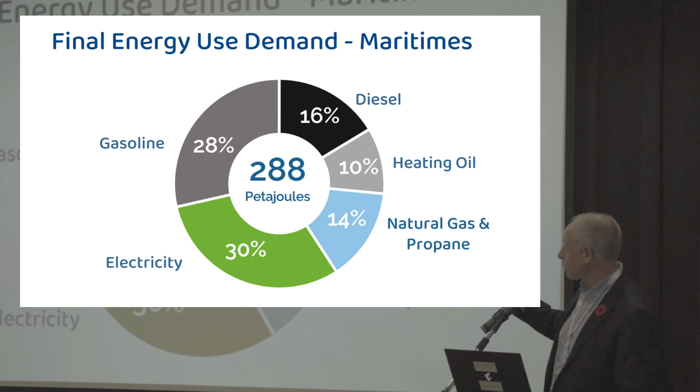So we use electricity to meet 30% of our energy needs. About 2/3 of that is clean. The other third is not. And over 50% of our energy demand today is met by refined petroleum products, either gasoline, diesel, or heating oil, and then about 14% comes from natural gas and propane. And like I said, almost all of this by 2050 is going to have to be clean.

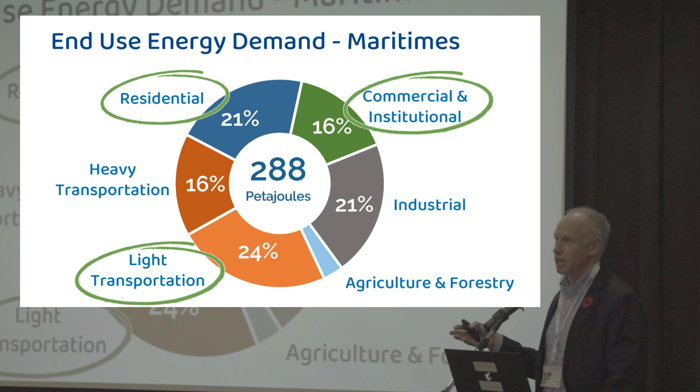And we hear a lot that the way we're going to get to net zero is we're going to clean the electric grid and we're going to electrify everything. And I think that's partly true, because when you look at many of our energy uses, they can be electrified relatively easily. So sectors like light transportation, heating, many residential and institutional and commercial buildings, and even some of our industrial processes can be fairly easily electrified.

But not all. There are many other energy uses that are going to be very difficult to electrify, or at least very difficult to electrify with batteries alone. So sectors like heavy transportation and high temperature industrial processes where you need combustion, like to make a brick or to make steel. And some commercial and institutional buildings, especially really big and really old ones, might be really difficult to heat only with an electric heat pump. And the reality is that these much more difficult to electrify sectors currently represent about 1/3 of our total energy use. But we're going to have to figure out how to decarbonize them too.

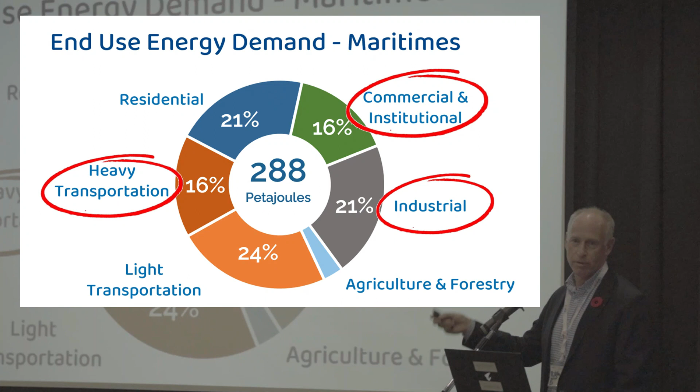So regardless of what the path to net zero is going to be, we are going to need clean electric grids, and we're going to need a lot more clean electricity. The Canadian Energy Regulator has forecast that here in the Maritimes, electricity demand is going to grow about 60% between now and 2050.

And so just to put that in context, to keep pace with growing electric demand, we need to build another hydroelectric facility the size of Muskrat Falls every 5 years until 2050. That's how much more electricity we're going to need. And even if we do that, it still won't likely be enough.

And part of the reason for that is that a lot of the increase we're projecting for electricity is going to be renewable, and those renewable sources like wind or solar are intermittent. And when we add a significant amount of intermittent renewables, it creates challenges trying to balance supply with demand. So if you have too much supply, you either have to store some of that supply or curtail.

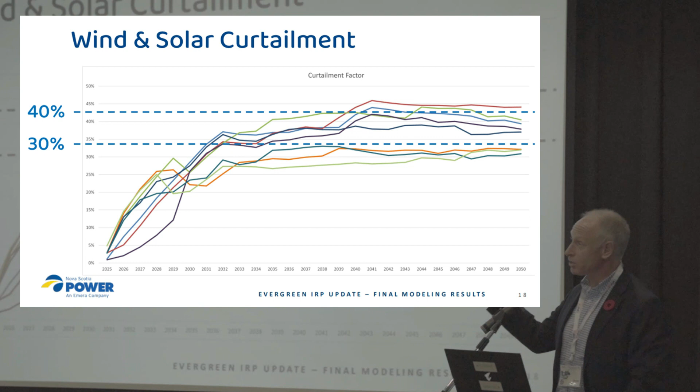And as a result of that, from Nova Scotia Power's latest integrated resource plan, they're forecasting that 30 to 40% of the potential generation from wind and solar will be curtailed through a combination of wind integration constraints, transmission limitations, or just balancing supply and demand. So times when supply exceeds demand, especially in the fall and in the spring. But we can do stuff with that power.

So what's the solution? I'll say, first of all, there's no one solution. I think that we know that. But one of them will be that in addition to having a lot more clean electricity, we're also going to need other types of clean energy. Types like green hydrogen that can be produced at large scale and then stored and transported and used in many of the ways that we use fossil fuels today.

One of the reasons why fossil fuels have been the backbone of our energy system for over 100 years now is because you can store that energy for a long period of time. And especially in a northern climate, we're always going to have that need. We're always going to need more energy in the winter than we do in the summer.

So we think that building a much more integrated energy system with an electric grid and gas grid working together in complementary ways is going to be a better way to get to net zero than trying to do it all with only electricity. And we see the more integrated energy system with linked electric and gas grids working together will also build a more flexible and a more resilient energy system. And I'll talk about that a bit in a minute.

But fundamentally, we have to start with two foundational principles. We've heard a lot about this today. Energy efficiency and conservation has to be job one. We need to do all we can to use less energy, conserve what we have, make our buildings better insulated, put in heat pumps when we can, convert from internal combustion vehicles that are about 20% efficient to electric vehicles that are a lot more. So that should be job one.

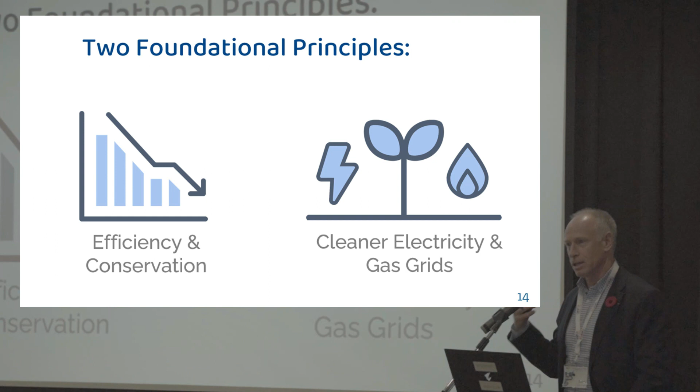But then we're also going to need cleaner electric grids and a cleaner gas grid. And we see the gas grid playing three very complementary roles to the electric grid in this more integrated low-carbon energy system. The first way that the gas grids can support the electric grid is through peak demand mitigation.

Because as we electrify more end uses like heating buildings, transportation, industrial processes, peak electric demand is going to grow. Energy efficiency and all that stuff is going to help have it grow not as much, but it's still going to grow significantly. And it's going to be a bigger problem in the Maritimes, even than other parts of Canada.

So in Ontario, for example, their electric grid peaks in the summer. Ours peaks in the winter. And probably, at least unless climate change gets to the point where winters here aren't cold, our electric grid is still going to peak in the winter. And this is one of the areas where the gas grid, especially the lower carbon gas grid, can play an important role. And let me try to illustrate this.

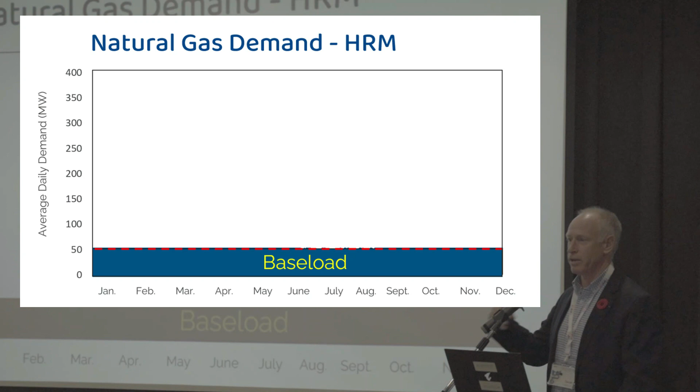This chart shows total natural gas demand in HRM for a full year back in 2021. We have about 50 megawatts of base load demand. So that's demand for domestic hot water, industries that are basically running 7 days a week, 52 weeks of the year. In the winter, average demand for gas is about 250 megawatts, so about 5 times higher. Not surprising.

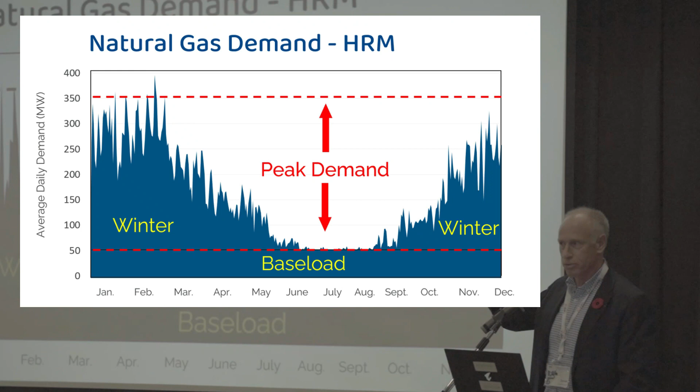On cold winter days, it goes to about 350 megawatts, so about 7 times higher. And you'll notice here, on the peakiest day, it was actually about 8 times higher. But the reality is, unless we want to be cold on that peakiest day, we need energy for that day too. The good news is that the gas storage and transmission and distribution system has really been built to address peak demand.

We can store enough gas, whether it's fossil natural gas, renewable natural gas, or other low carbon gases. You can store it in massive quantities. And unlike a battery that can store energy for a few hours or a day or two, you can store that gas for an indefinite period of time. Frankly, you can do that with oil and gasoline as well. That's why we have these massive tanks. We don't like them, but the reality is they can store energy for a long, long period of time.

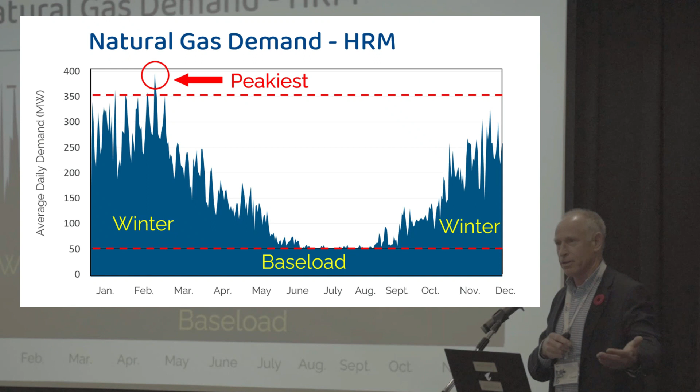So that becomes important. And then you think, okay, so how does the ability of the gas system to do this complement electrification? Here's one example. In a hybrid heating scenario, electric heat pumps are an excellent and very efficient way to heat most buildings on most days. But on the coldest winter days, when the coefficient of performance of the heat pump drops significantly, just as demand for electricity begins to skyrocket, that causes a huge spike in electric demand.

And in Nova Scotia Power's integrated resource plan, they obviously look at many, many different scenarios. And one of the scenarios they looked at was hybrid peak mitigation: how much of that electric peak do they think they could mitigate with a hybrid heating solution? And what they determined is that there may be significant cost savings to heat many, if not most, buildings with a hybrid system rather than 100% electric.

And the way that this would work is, you have an electric heat pump, and probably 80% or more of the heating demand for that building is met with the electric heat pump. But on the coldest days, when peak electric demand goes up and the efficiency of the heat pump drops, at some point the smart control takes over, shuts the electric heat pump off, and turns a backup boiler or furnace on. And that, frankly, could be run by any kind of fuel.

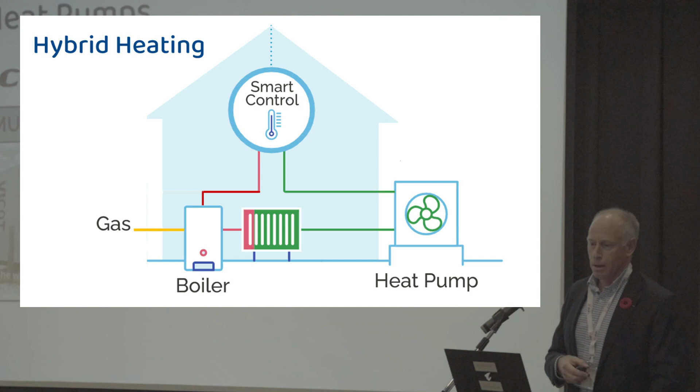Another potential solution in certain kinds of buildings is gas heat pumps. Gas heat pumps work in a very similar way to an electric heat pump. They transfer heat from the air and can do that without putting much strain on the electric grid. At Eastward Energy, we're currently involved in 3 different projects to test different types of gas heat pumps in different kinds of buildings. We have one for large multi-unit residential buildings, one for smaller MURBs, in the 4 to 12 unit range, and we're also starting a project testing a gas heat pump in single-family homes.

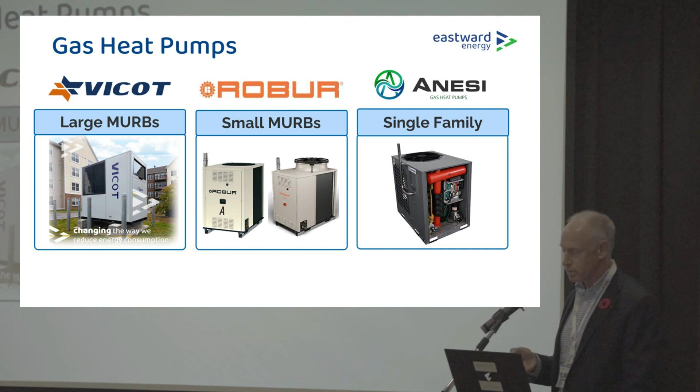This is a 140-kilowatt gas absorption heat pump that we've installed in a 65-unit apartment building in Halifax. And I'll say at the outset, I'm not saying that a gas heat pump is better or worse than an electric heat pump. It really depends on what the application is.

Electric heat pumps generally have a higher coefficient of performance, and where they can do the job, they're probably the best solution. But in many existing buildings, especially older buildings that have a hydronic system and aren't very energy efficient, a gas heat pump might actually be the better option. A gas heat pump does operate similarly to an electric heat pump, but it only uses about as much electricity as a hairdryer.

So that means that, while lots of buildings will have electric heat pumps, and on cold days, electric peak will go up because of those, a building that has a gas heat pump is not going to experience that peak. One of the other benefits of a gas heat pump, again, in the right kind of building, is it can essentially be a drop-in replacement for an oil or a natural gas boiler. So there's minimal additional capital.

So often if you're retrofitting a building, especially an older building, to put in an electric heat pump, the cost of the electric heat pump is only a small portion of the cost. Often you're having to convert a hydronic system to a different kind of system, or doing a significant energy retrofit of the building envelope to ensure that it can operate effectively with an electric heat pump.

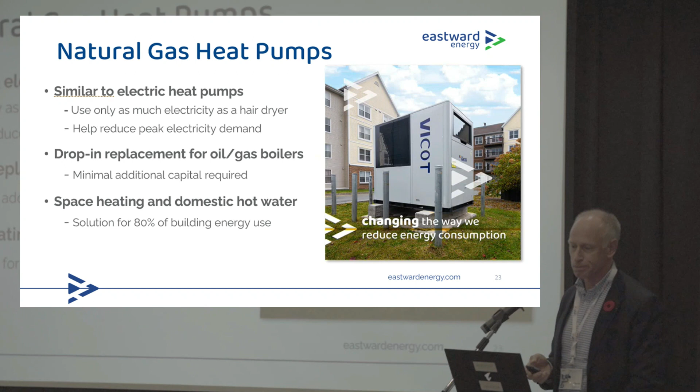Conversely, a gas heat pump like this one can just be dropped in, connects directly to the hydronic system in the building, and can provide both space heat and, in some applications, domestic hot water as well. The second area where we feel the gas system can complement the electric system is in the area of resiliency.

Almost all the natural gas infrastructure here is underground, so it's not vulnerable to severe wind events, which we experience a lot of, and unfortunately with climate change, we're experiencing them even more frequently. So as a result, a typical Eastward Energy customer would experience a 1-hour service interruption every 70 years. So again, if you think about an electric grid that is increasingly vulnerable, think about how that gas system can kind of support the electric grid.

And then the third area where we feel the gas grid can play an important role is to help decarbonize sectors that are going to be hard to abate. And so low carbon gases like green hydrogen and renewable natural gas can help decarbonize these sectors, like heavy transportation, especially long-haul heavy transportation, high-temperature industrial processes, and maybe some buildings as well.

So we're doing a lot of work now on green hydrogen to try to determine its best applications here. And we really believe that green hydrogen is going to have to play a role if we're serious about getting all the way to net zero by 2050. And we think that because you can produce green hydrogen at large scale. You can store it for long periods of time. You can move it around, especially within relatively small areas, like within HRM.

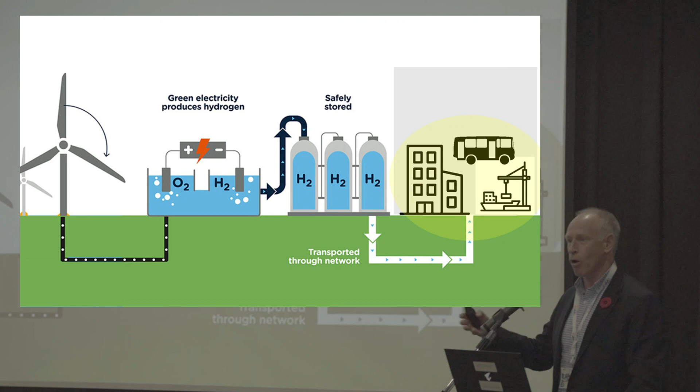And this is sort of what a facility might look like. This would be about a 5 megawatt electrolyzer facility. It would produce about 100,000 gigajoules a year of green hydrogen. And the sectors where we think it's going to play the most important role, especially in the short term, is in the heavy transportation sector. And we use 1.3 billion liters of diesel in the Maritimes every year. And most of that is for heavy trucking, transit buses, and marine applications.

And while some of these transportation applications can be electrified with batteries alone, hydrogen fuel cells are likely to be a more practical zero emissions alternative, especially for long haul trucking, trains, long transit routes that are kind of beyond the range of a typical battery electric bus, and with some marine vessels as well.

And this is not to say that batteries or fuel cells, that one is better than the other. They both have unique advantages and disadvantages. And that really determines the best application.

So for passenger and light-duty vehicles, for example, that sit idle for 90 to 95% of the time, they generally drive short distances. I know we get really concerned about range anxiety, but if you really think how many times a year is that a real concern, you can usually count them on one hand or even one finger. And also for applications that don't carry a lot of load, batteries are likely to be, well, already are, the most practical option.

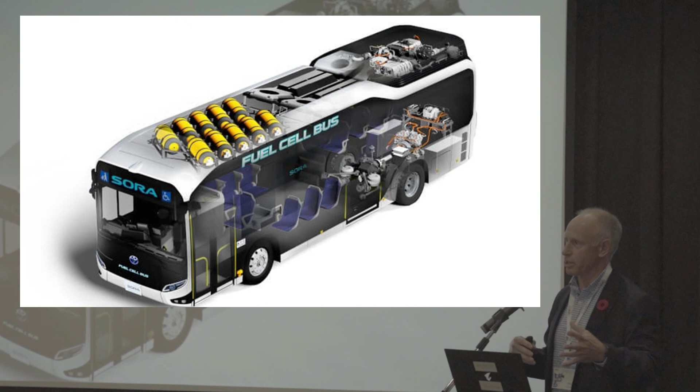Conversely, a fuel cell electric bus on those types of routes can basically be a one-for-one replacement with a diesel bus. So that's why transit agencies like Halifax are committed to transitioning to a zero-emission bus fleet, and that fleet is likely to be some combination of battery electric and fuel cell electric buses.

So while hydrogen is obviously in its infancy, and we've heard a lot about hydrogen in the last couple of years, I'm optimistic that within the next 2 or 3 years, there will start to be green hydrogen available here. We can also produce other types of low carbon gas, like renewable natural gas, which is made from organic waste. So think of green bin waste, landfill waste, wastewater.

And these projects as well can essentially, the way that I think about this is, if you buy, say, green choice electricity, the electrons are exactly the same, but you're ensuring that the electrons that you get came from a renewable source. Renewable natural gas is much the same. You can't distinguish a molecule of renewable natural gas versus fossil natural gas, but the way it's produced is much different.

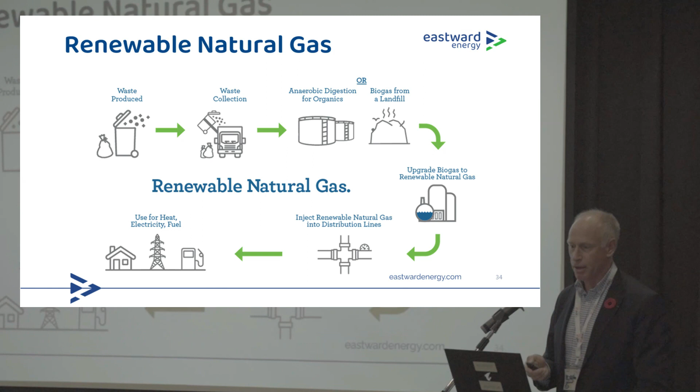It takes green bin waste, runs it through an anaerobic digester that produces biogas, and then that biogas is upgraded by removing carbon dioxide and other impurities, and that renewable natural gas then can just be blended into the natural gas system. Molecularly it's exactly the same as fossil natural gas, but every gigajoule of renewable natural gas you produce displaces a gigajoule of fossil gas.

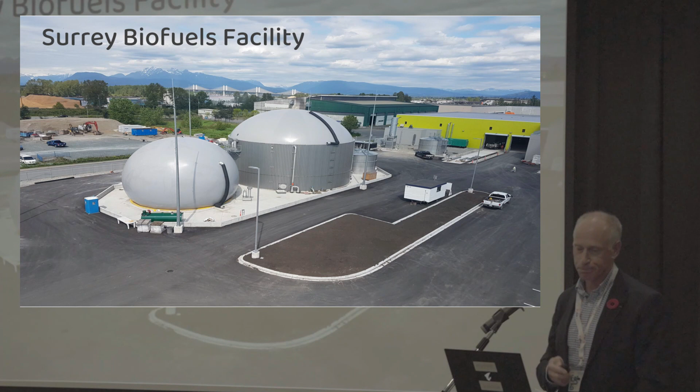Conversely, you could use that same renewable electricity in an electrolyzer to produce hydrogen, and then use that for heavy transportation, high temperature industrial processes, and if you needed to store it, you could store some of that for long durations of time. So that's the way we see it working.

So you see, we're not trying to say one type of energy is better than the other. I think to get to net zero, we're going to need it all. We're probably going to need it all and then some. The challenge is figuring out what's the best type of energy to use for the right application at the right time. But I just want to conclude with a quick story about what the future might look like here.

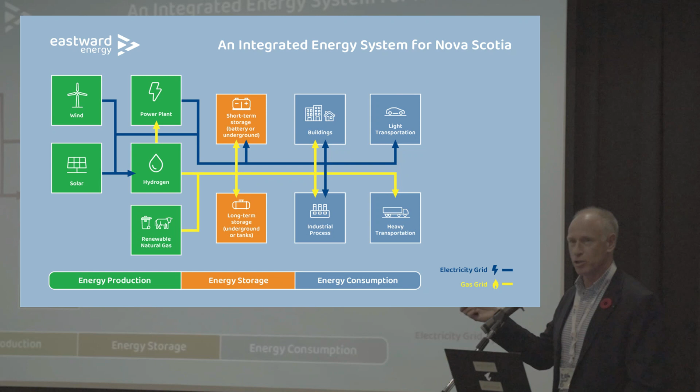In the northern part of Great Britain, they are starting an ambitious project called H21. H21 is a project to convert the gas networks in the northern part of the UK from natural gas to hydrogen starting in 2028. And there are a lot of parallels between what they're doing and what we could do here.

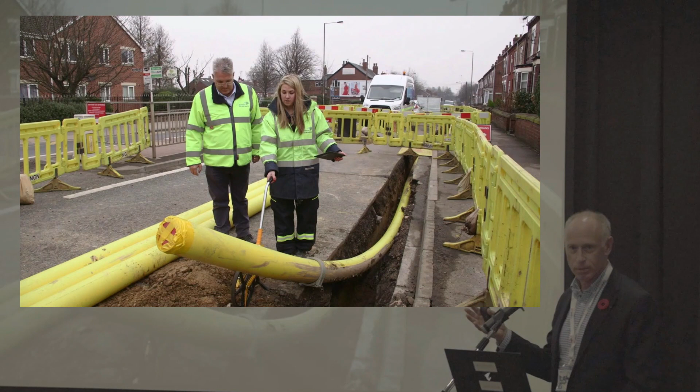The city of Leeds, which you can see here, has been proposed to be the first entire city in the UK that will convert its natural gas system over to a hydrogen system. It's a really interesting case study for us because Leeds is a northern city. It's about twice the size of Halifax. It has a winter peaking energy grid like we do. And the natural gas grids in Leeds and here in HRM, and in New Brunswick for that matter, are also similar in one really critical way. And that way is pipes, specifically plastic pipes.

Hydrogen is best transported and distributed in plastic pipes because it tends to leak through, especially older steel and iron pipes. The reality is that most gas distribution systems in North America and Europe were built 75 years ago or more. There's some parts that are really new, but some parts are really old. The older parts tended to be built with steel or iron pipes that are not really compatible with the distribution of hydrogen. So what Leeds is doing is they're in the process now of converting all of their old steel and iron pipes over to plastic pipes.

But conversely, the gas distribution system in the Maritimes has all been built within the last 25 years, and almost all of it has been built with yellow plastic pipes. So this means that we probably have the most hydrogen compatible distribution system anywhere in North America, right here. And so there are things that we could do with hydrogen, even in the short term, that most other gas utilities in North America or Europe can't do, or at least can't do without this kind of a replacement.